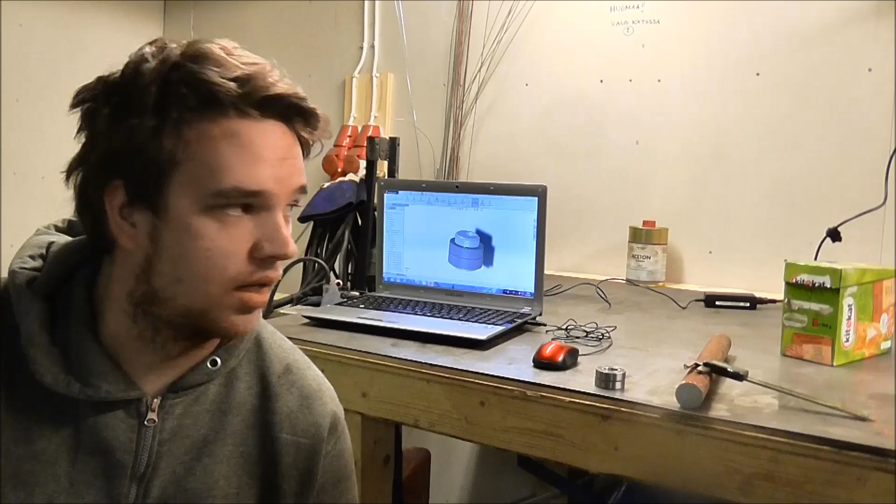I also have most of the material, and I'm not making it all myself. I have some parts that I bought from a store, and I now have all of them. Most of them are small parts, and they are actually in this box. I'm not gonna show you what's inside, but piece by piece you will see a little bit more about what I have.

Some parts I'm gonna film at my workshop right here, and some will be filmed at my school, where I can use my school workshop.

We just got a new milling machine in there. It's a Chinese made mill, but it's all new, and it has a DRO, so it should be pretty accurate and easy to use. Also what's interesting about this project is that for the first time ever I'm gonna use a CNC machine.

It's a CNC mill, 3-axis, pretty small, it has fanuc control, the make is Dahlih. It's made in Taiwan also. I think the year is 96 or 98, something like that. So this spring I'm also gonna learn some CNC milling and CNC machining.

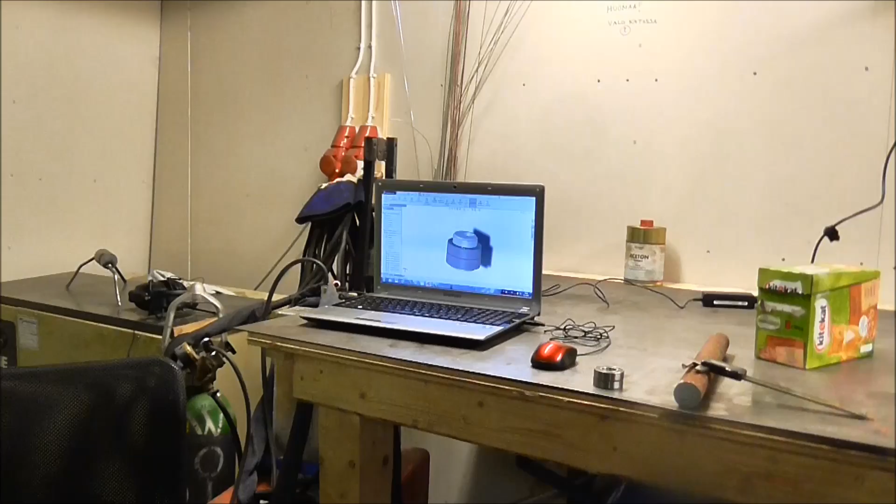But now let me tell you a few words about what I'm doing first. Let me get the camera in focus. So, what I'm gonna do first is right here.

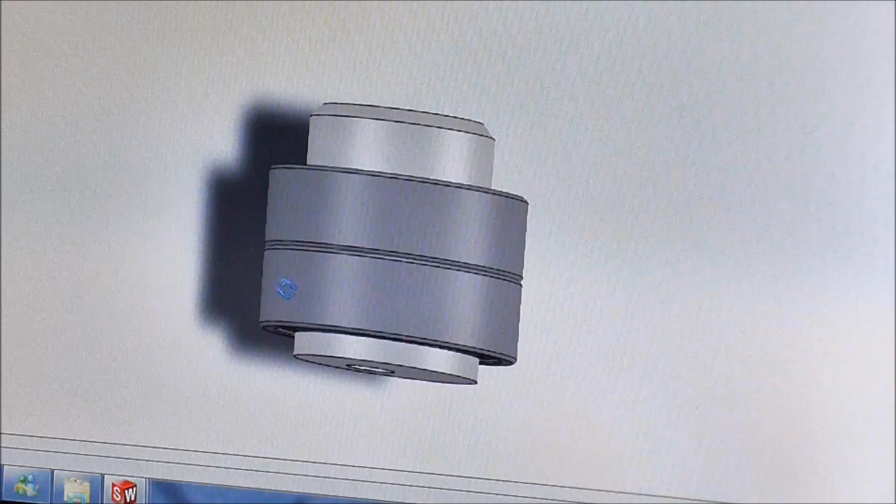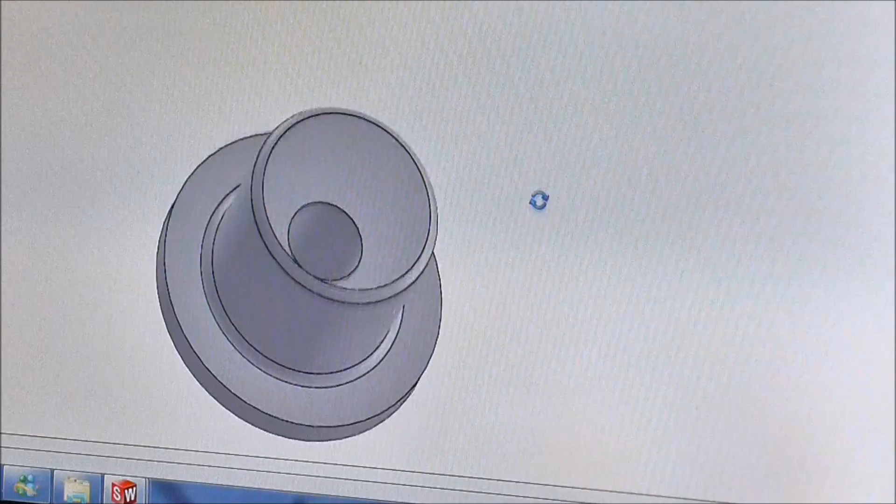It's made of two parts actually. It has a shaft in here. Let me show you. Well, this doesn't show you too much. So it has a shaft which is right here. It's just a shaft with a hole going through it, but the hole is off center by 5 millimeters.

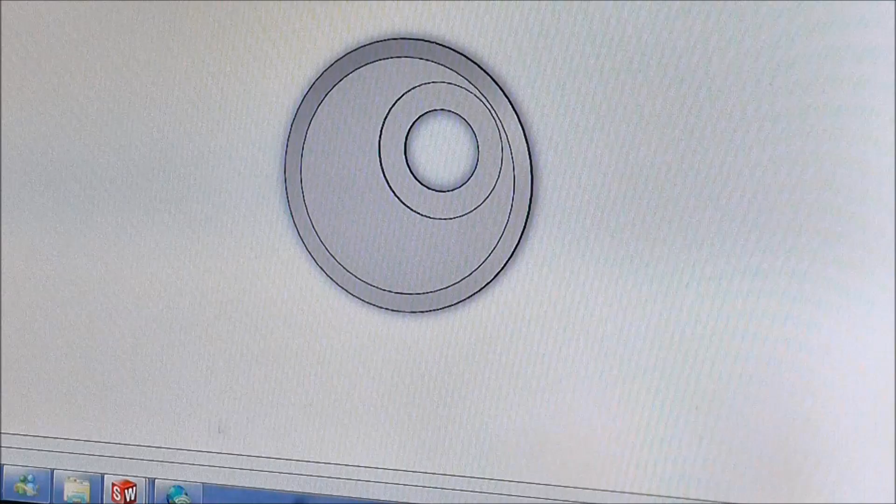Then I have a cap, which is right here, and it has a hole for an M8 hex cap screw, and this is the whole assembly. So the shaft is in here at the bottom, and the cap is on the top.

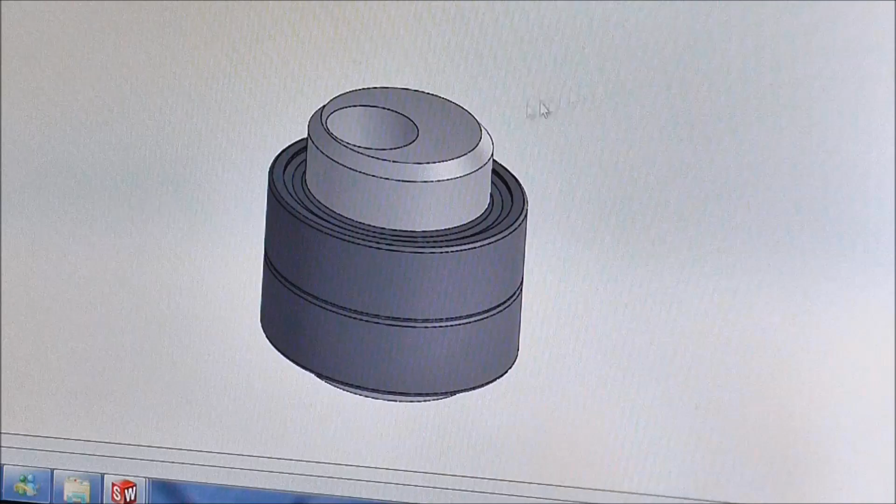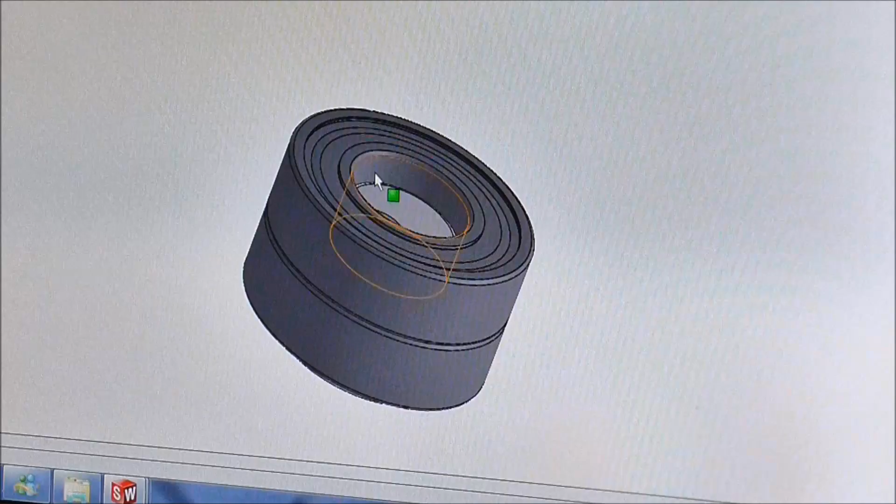And here I have two 6004 RS bearings that I'm gonna fit in. There's gonna be a slide fit on the shaft, and then the cap is gonna tighten the bearings in. The cap right here, I can hide it for a minute. It goes 5 millimeters deep into the bore of the bearing, so it will center itself.

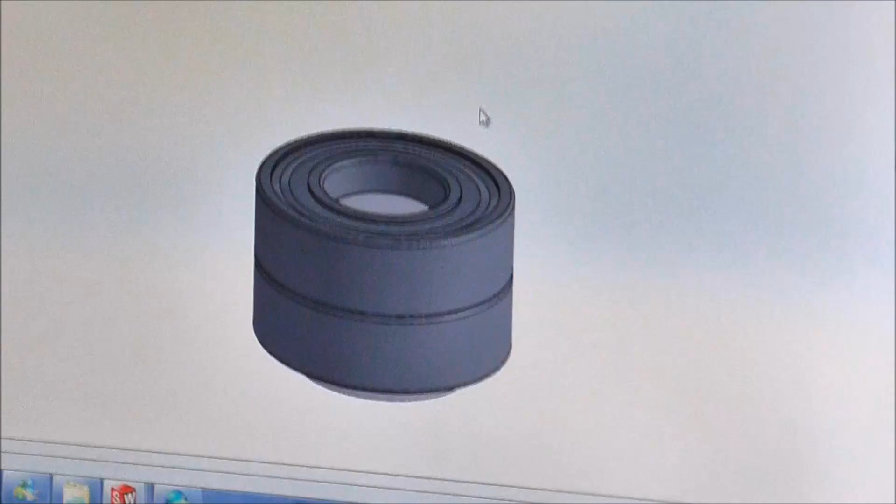I have the drawings made, and I will show them to you in a minute. Okay, I had a printed version of these drawings, but I forgot them home, of course, so I had to sketch quickly some new plans.

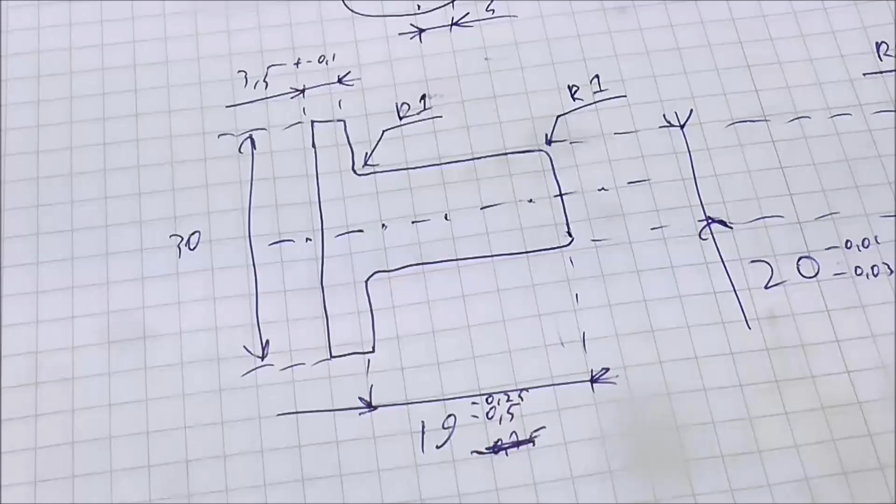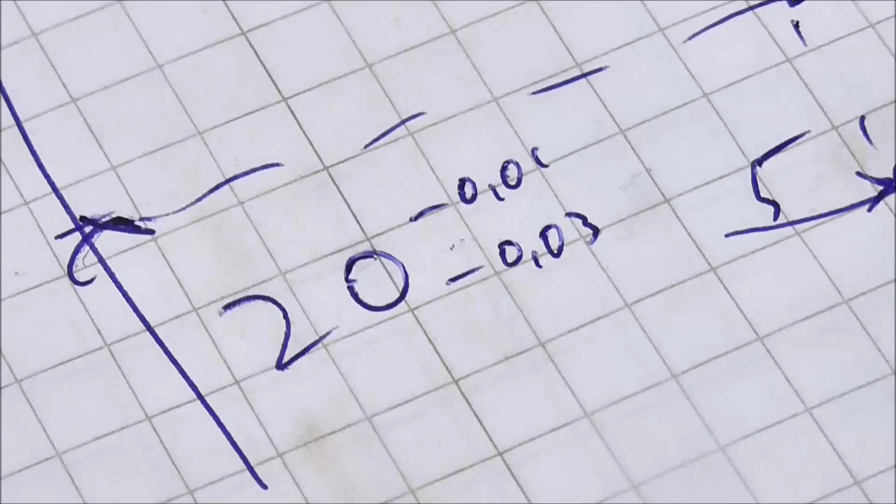So first I'm gonna make the shaft itself, which has one accurate dimension. It's this shaft dimension, the tolerance is 2 hundredths of a millimeter, from 1 hundredth under to 3 hundredths under. So it should be a slight fit. And these bearings are actually 1 hundredth under size.

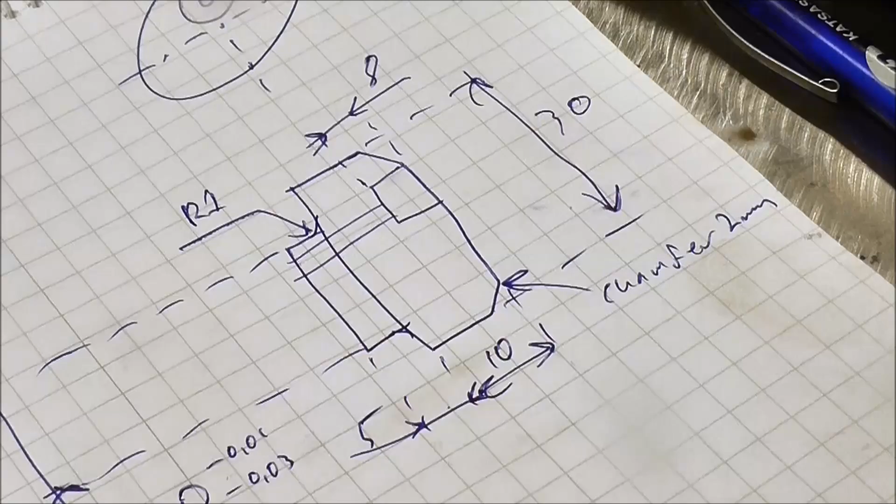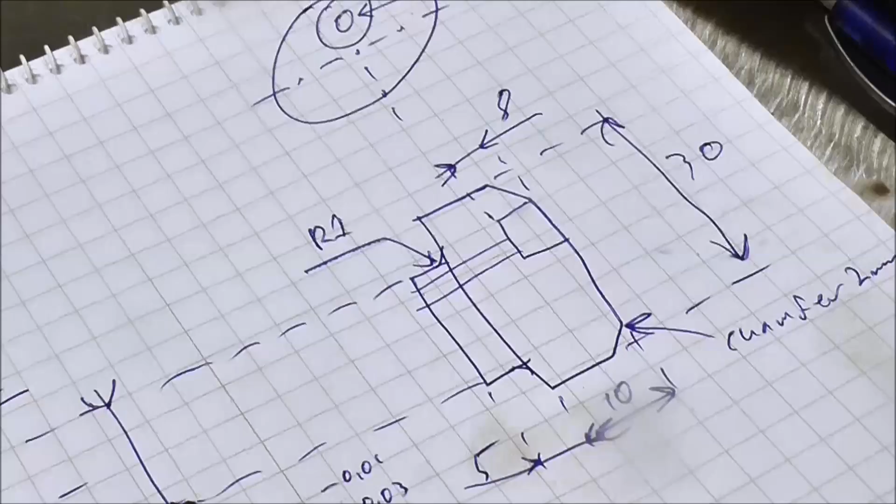Then the cap will be something like this. It has the same diameter for the shaft as this one, and then this diameter's length is 10 millimeters and the diameter is 30 millimeters. This is from the upside. It has the countersink for the bolt, and this is the upside of the other one. So it has an 8 millimeter hole with 5 millimeter offset.

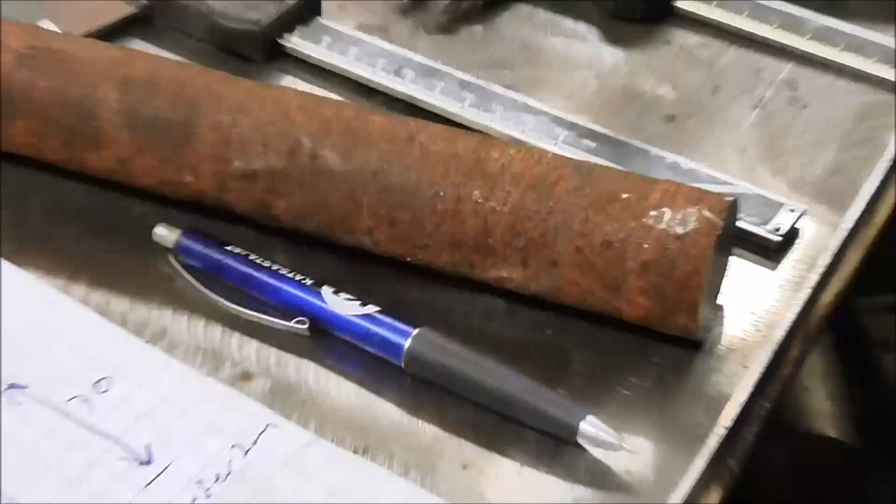And the material is here. It's very rusty, but it's soon gonna be shiny. So I guess the first thing to do is to start sawing the pieces.

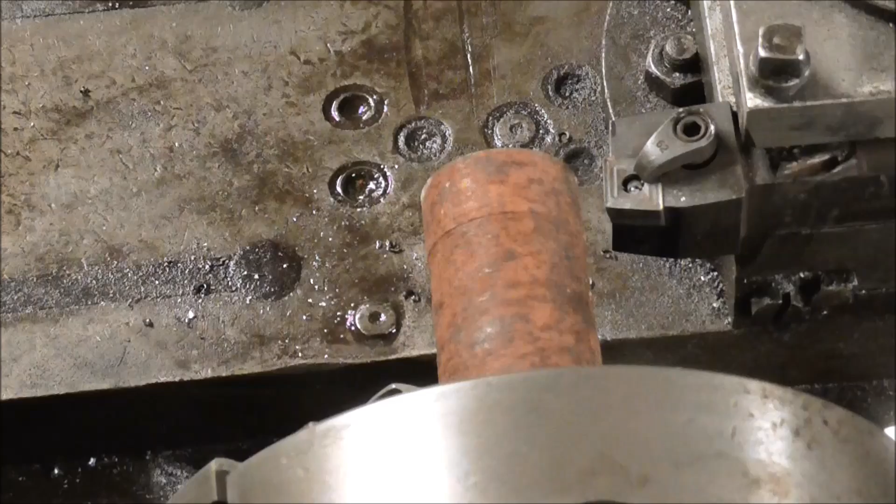Okay, ready to start working. I sawed a piece of the long bar, and the diameter of this bar is 35 millimeters. So I'm first gonna clean it a little bit and then rotate it, because I used this actually as a test bar on my old lathe, and the diameter is so inconsistent that I don't want to take any heavy passes with the outside still in this rough form. So I'm gonna clean this end, and then rotate the piece and start the real work.

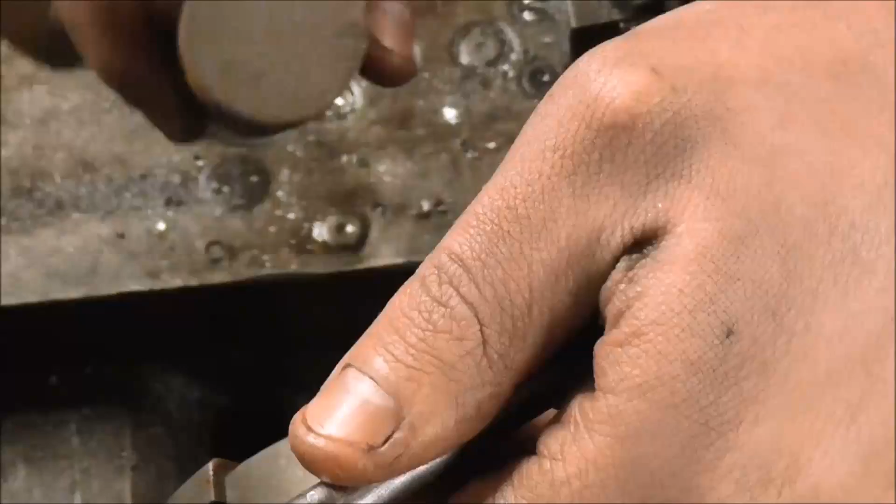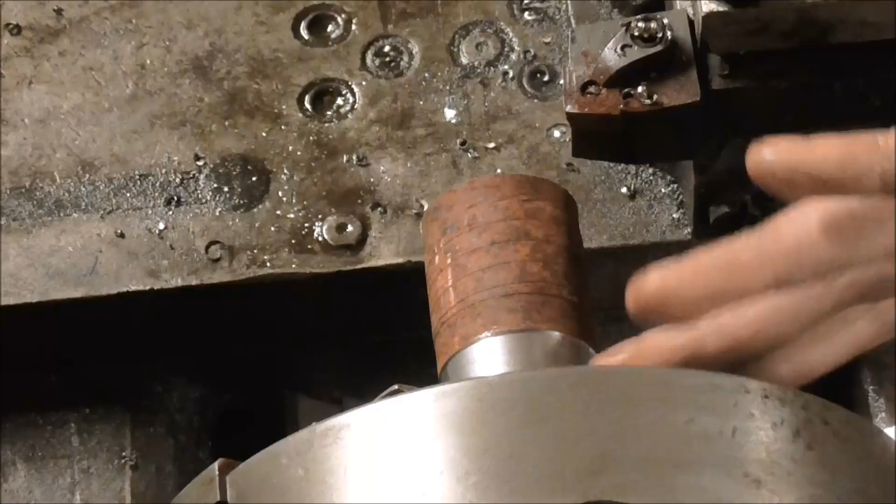Okay, now I'm gonna turn the piece. This chuck is, I would say, pretty much dead. It even has some cracks in the ways of the jaws, so the jaws will always bell mouth, I think it's called. The outside of the jaws pushes out when I tighten the chuck. So if I put a piece all the way through the jaws, there will be a gap on the outside, and it's just horrible. At the moment I can only use about 2/3 of the length of the jaws. When doing that, it will tighten up just fine, and that's what I'm gonna do now. Okay, let's continue.

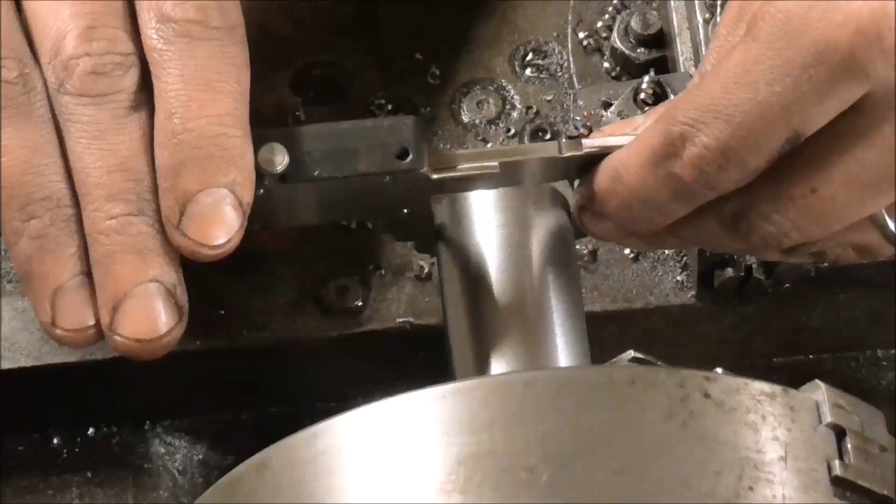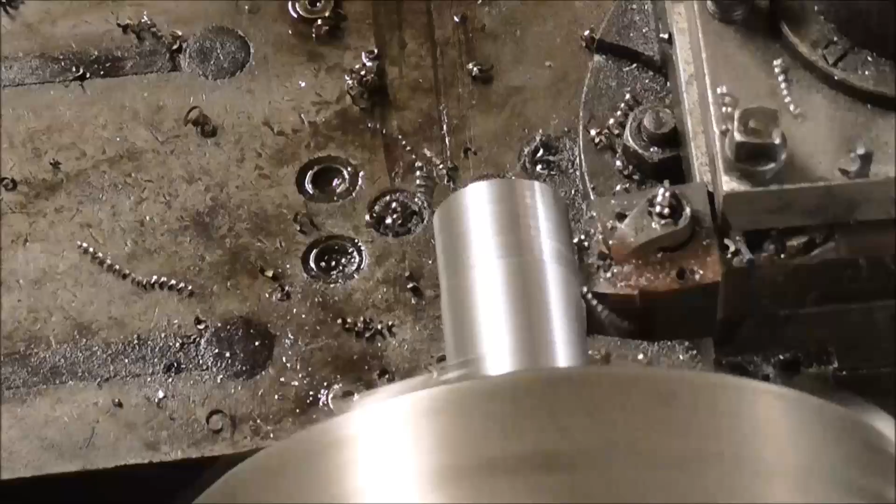100 over. That's pretty good.

And now I'm gonna switch tools. Let me find my wrench.

Okay, continuing. I switched to this tool, which is actually a threading insert tool. I just happen to have some old inserts that fit this tool. Because actually the only tool I can use that's right hand for this lathe is this one, and as you can see, I cannot make 90-degree shoulders with this insert, so I have to use this one. I actually had to grind a little bit off this side because the tool would otherwise be rubbing all the time. I should really invest in some new tooling for this lathe. All of my tools have a 25mm or 1-inch shank, and these tools are 20mm or 3/4 inch shank.

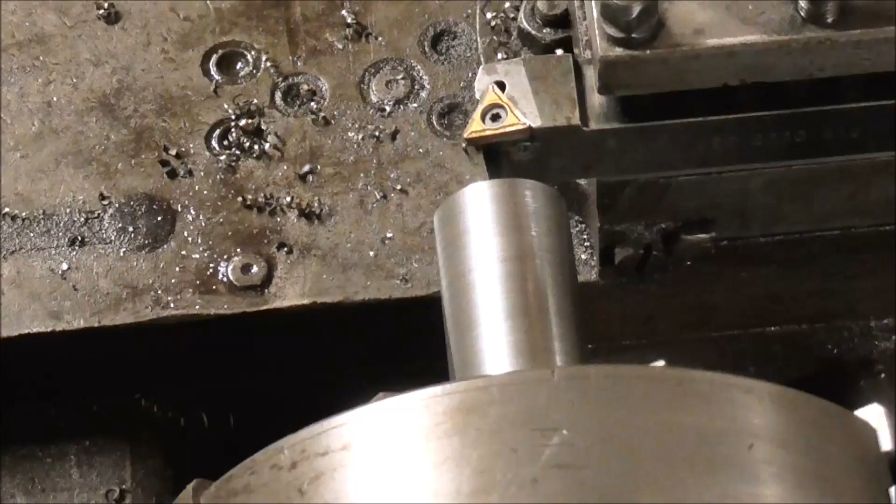Okay, let's see if it cuts at all. First, I'm gonna face the end and reset my Z-axis. Okay, let's go.

Okay, seems to cut pretty good. Zeroing the Z-axis now. I really like the dials on this lathe, very big and clear. The length will be 19mm and the diameter is 20mm, so zeroing the other axis too. Okay, let's start.

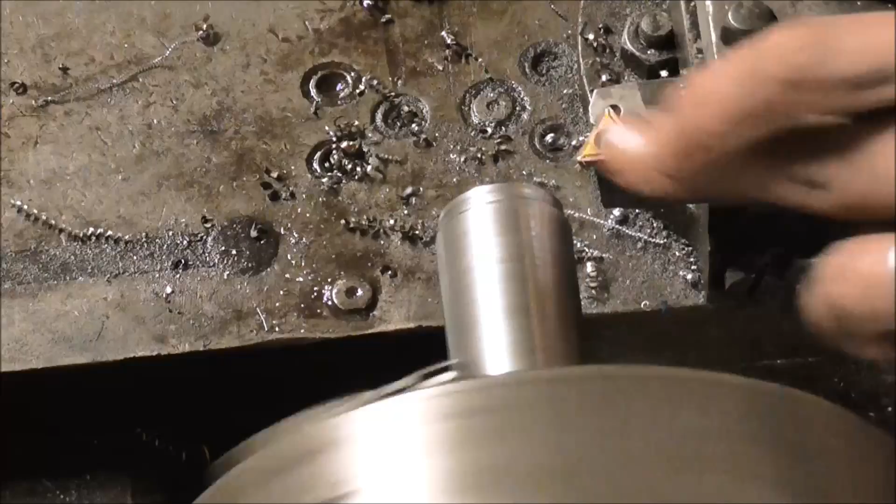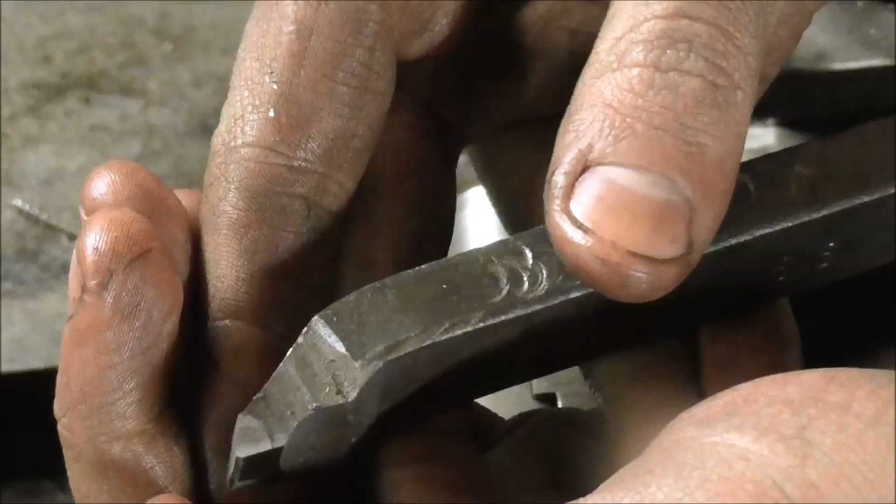Okay, looks like the insert is not working with this holder. I'm not sure if you can see, but it's actually pulling itself off. I have to change tools. Okay, this is what I'm gonna have to be using, it's a brazed-on carbide tool. I put some new regrind on it. Let's see if we can get anything out of this tool.

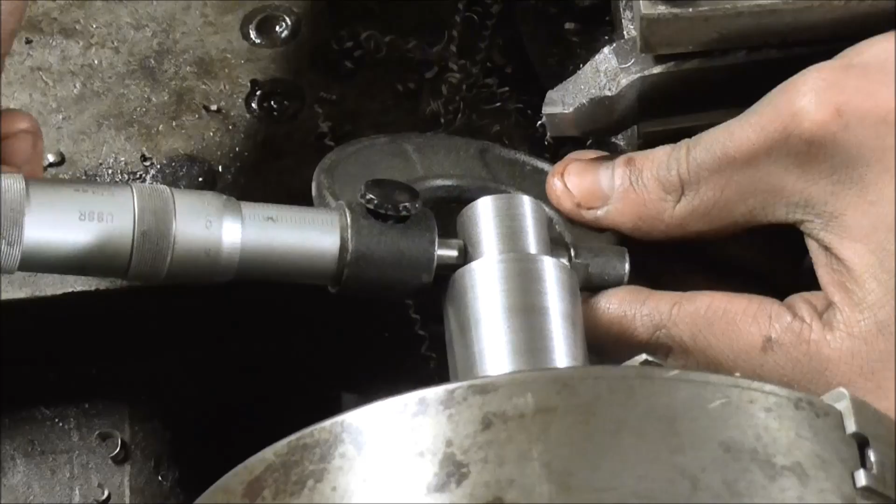Actually, I've been having some reliability issues with this micrometer, which is weird because it's a Soviet-made micrometer, it should be really good. Let's see what it says. It's saying around 900-something, which I think is pretty much the same as my caliper. No, actually my caliper is a little less. Let's try my other caliper. This is my number 1 caliper, I try to keep this as well as I can. It's 700-something over, so actually I think I'm gonna have to do some more inspecting on this micrometer. So for now I'm gonna trust my Mitutoyo calipers, which should be okay within 1/100 of a millimeter, plus minus.

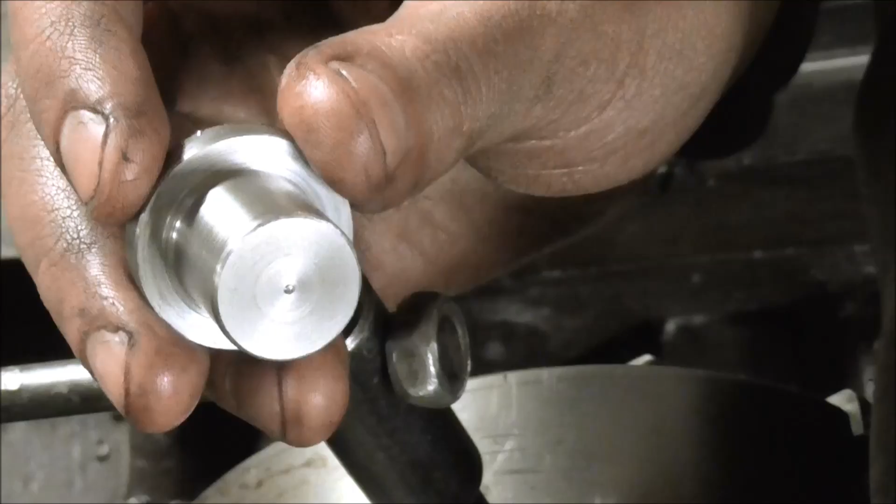Okay, I spent a long time looking for my parting tool, but I couldn't find it. I have somehow lost it. I've been doing a lot of arranging and cleaning in my shop to make things easier to find, but actually it seems to have worked the other way around. So I couldn't find my parting tool, so I just sawed the piece off, and now I'm gonna put it in the chuck the other way and just face the end.